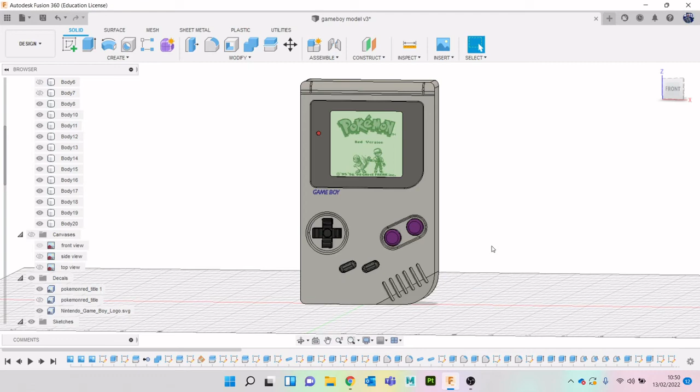So in the past video we've got our overall front shape pretty much finished with the front. We might have to add, if we look back at our reference images, so we need to have like start, select, A, B, so we'll work out those in a little bit.

But we want to have a look at some of these details on the side now. So first of all, let's do volume controls. We've got that little headphone jack, so let's do that. So let's turn our cameras on and let's do our side view.

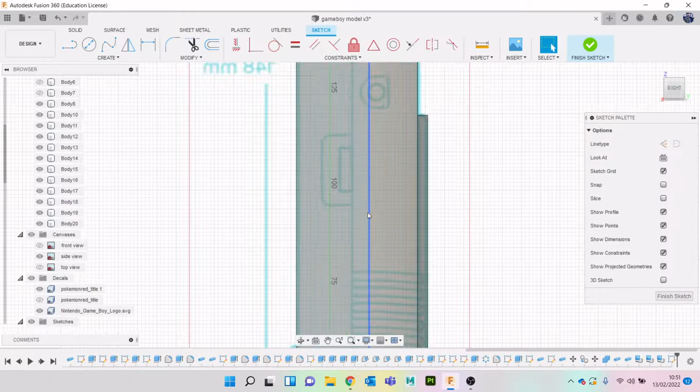Perfect. So let's go to sketch, start a sketch, let's sort of see what we're after. Okay, so it's kind of indented a little bit, and then there's a wheel. So let's hit R for rectangle and let's bring that up.

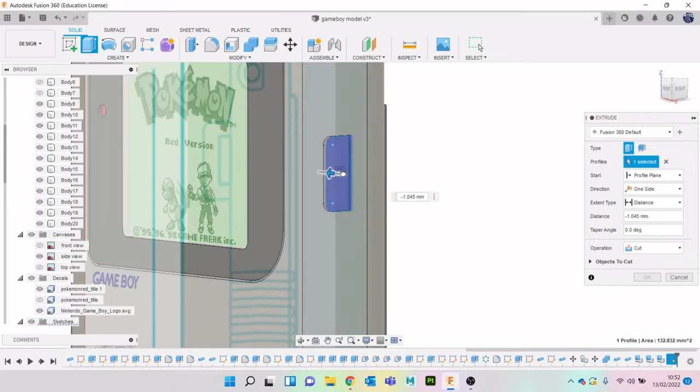Let's fillet. That actually looks okay, let's do that. Hit E to extrude, let's bring that in a little bit. There we go. And then let's do

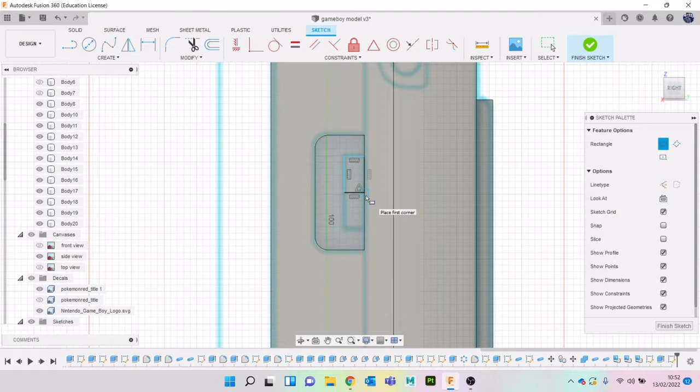another sketch. Let's do R. I'm going to go about halfway, which is there. Sketch, let's go to revolve. Revolve that profile around that body. Let's do new body for now.

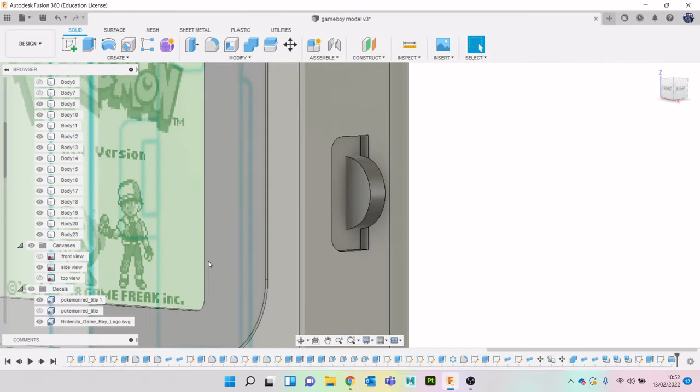We don't want it to stick out quite that much. We want it to go a bit further in. But before we do that, okay, it's a little bit hard to see, but you do have some little details we want to have. So let's right click and isolate.

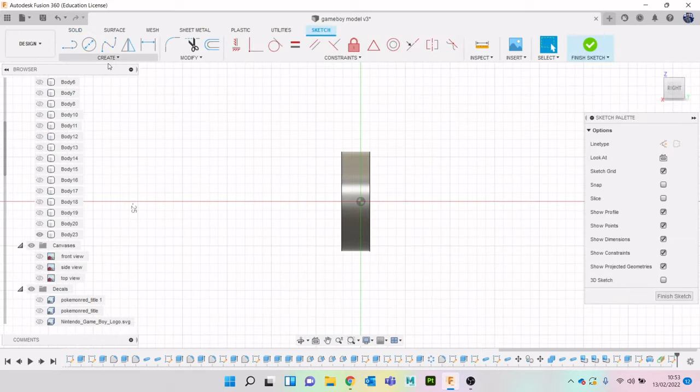Okay, so now let's go to construct tangent plane, click on that face, create a sketch, and R for rectangle. Let's do center rectangle, and then I'm just going to do that. Hit E on my keyboard for extrude, and I'm just going to drag it in just a little bit like that.

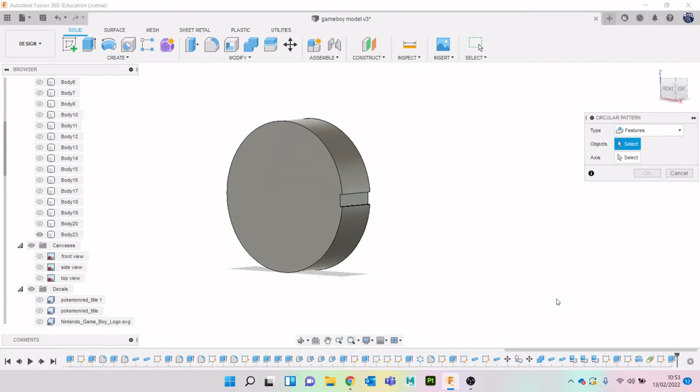So now go to create pattern, select the pattern. I want to change to features. Click my extrude axis. Let's pump those numbers up a little bit and do something like

that. There you go. Let's go to right click and isolate. I'll take that, move, I want to move it in a little bit. It shouldn't be sticking out that much. Let's do something

like that. But we do want to make sure there's space for that. So let's then do combine, tool body, target body that, tool body this. We want to cut, but we want to keep it. So we'll do that. So now you can actually see there is, get rid of that, a hole there for it.

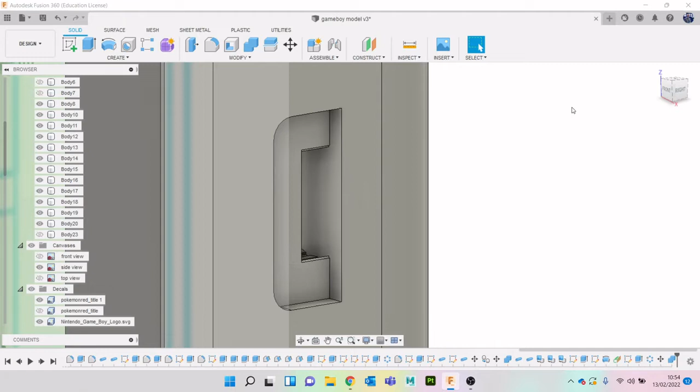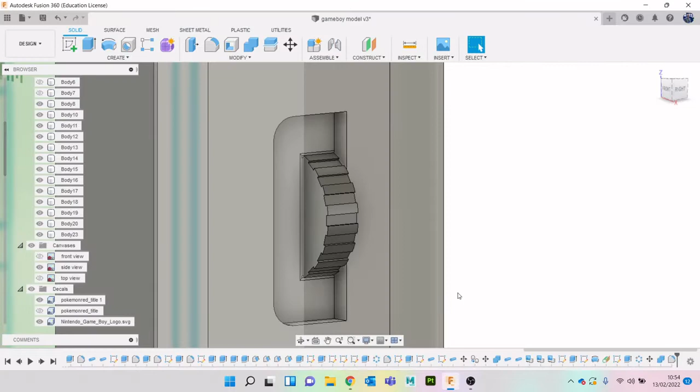Excuse me. Then let's just fillet the edges a little bit, just so we can see it has a little bit of space. There we go. And then I imagine that's just black. Yep, and we should already have our black from our. Yep, there we go. Let's drag that over to there.

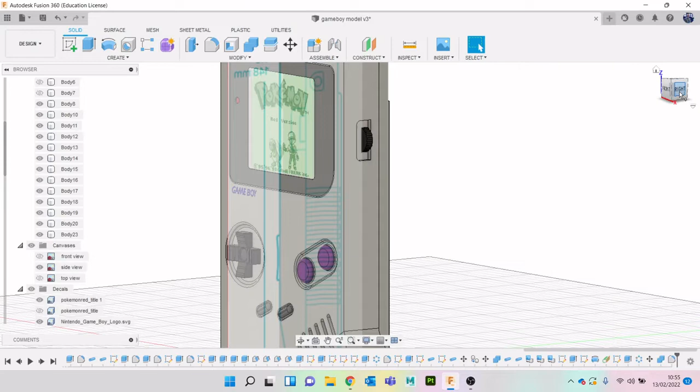Perfect. And then what other details did we want from the side? Okay, so we can close you for now. Let's have a look at this. We'll go to sketch. Let's again do R for rectangle.

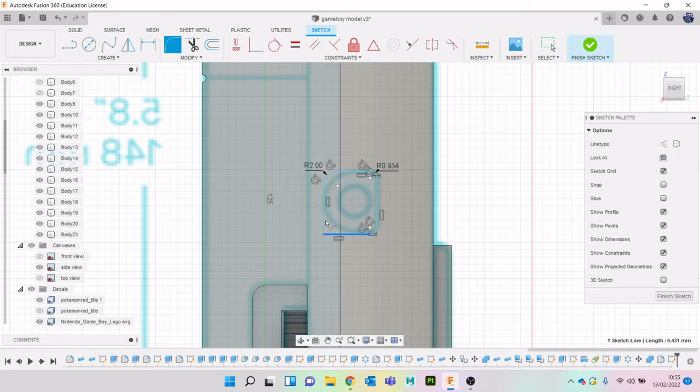A couple of fillets, let's bring it back a bit. Then this one is a much bigger fillet. Enter. And then let's E for extrude, let's bring that in.

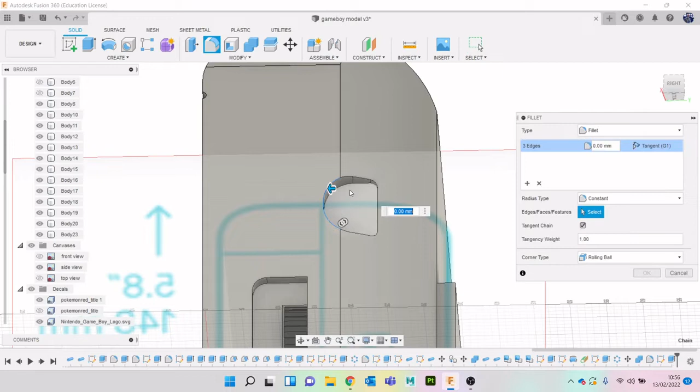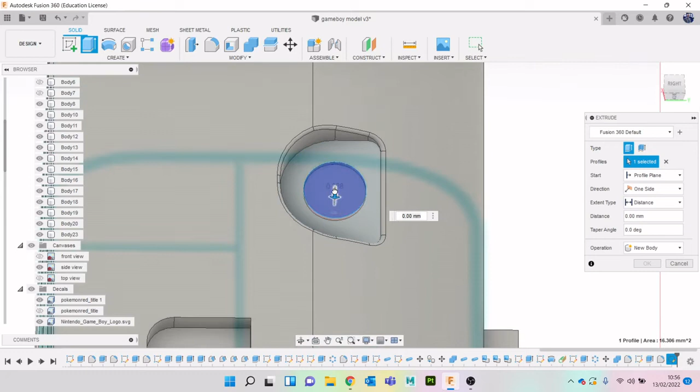Let's fillet that edge so it's not quite as extreme. And then we want to do in the sketch a circle close to the middle as we can do. E, and let's drag that down a bit. Again, let's fillet.

Go back to our reference. Okay, we'll make that black again. Oh no, let's make sure we've got faces, otherwise we don't undo all of our other details we put in. How are we looking? Not bad.

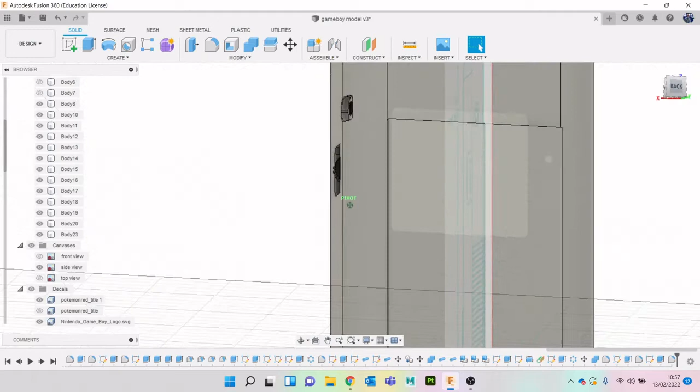Okay, and we're going to start to have some of those bent lines go all the way round, don't they? So really, let's have a think. I'm thinking I'll probably do them the same way I did in the previous video, where I kind of did a projection and then...

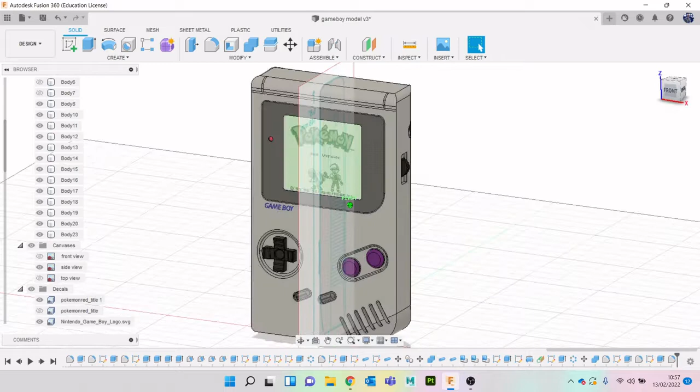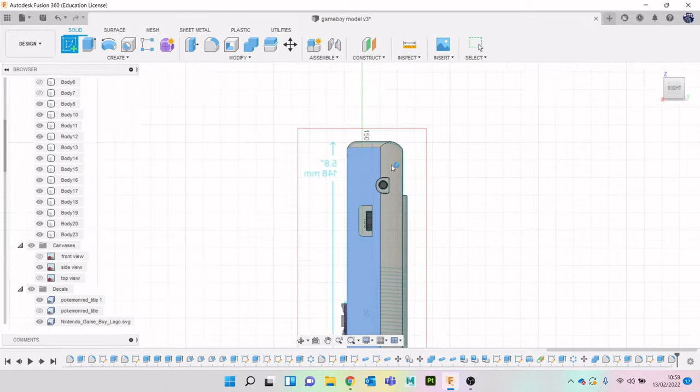Let's do the bottom bit first, so I'll do all the side details. If we look back, we want this little headphone jack coming along there. Oh, we also of course want to have...

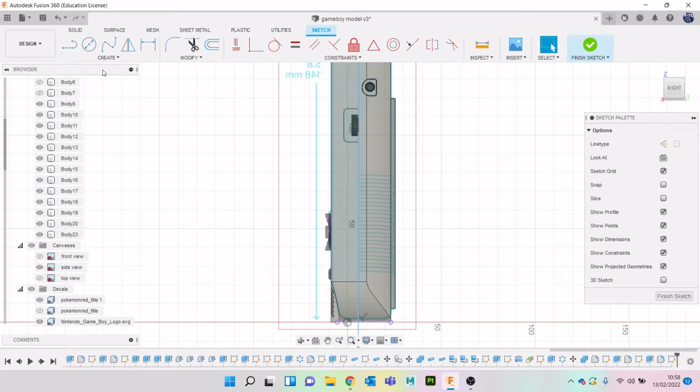Let's do this line first actually, our join from the hollow casing. Turn snap off. I turn snap off. Let's bring you all the way down. Finish sketch, create a pipe. I do not want to cut that, so that's...

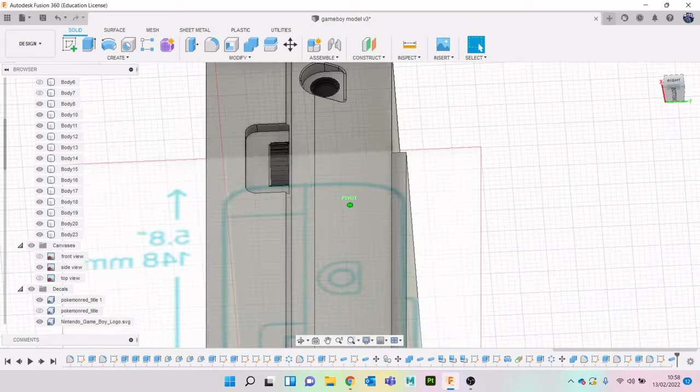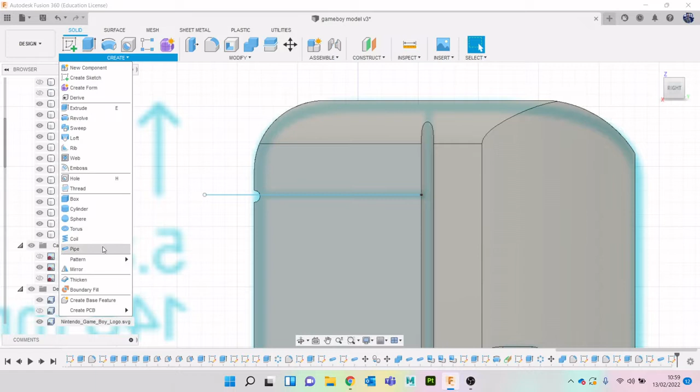Okay, and then do the same up here. Create pipe. Okay.

Now we've got the same thing from before that we need to make sure we are doing. So let's go to sketch, hit P for project, and just grab that. Finish sketch, create pipe.

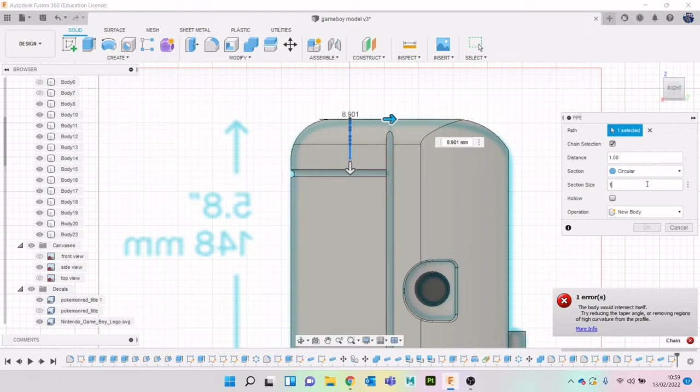Go to new body and let's just drag. Oh no, we don't need 1 mil. There we go, new body. Right click, move, go into position, then let's cut. So target body, tool body. Don't want to keep it that time. There we go.

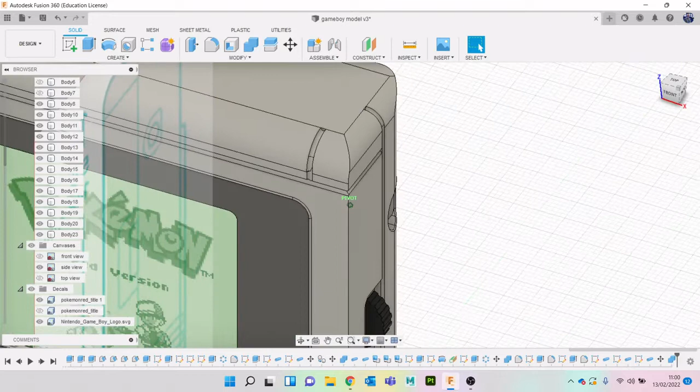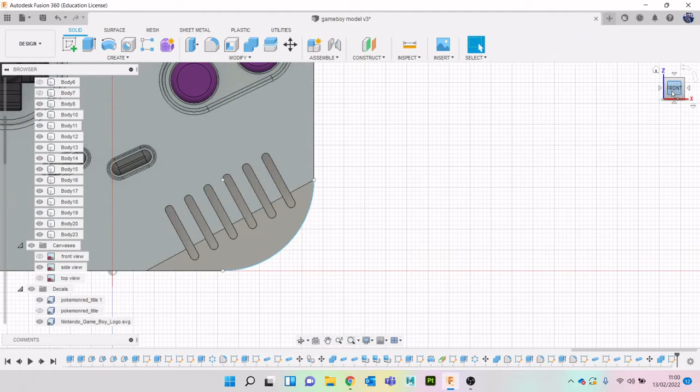And then we'll do the same down here. So let's create a sketch, P for project, let's grab that, let's go to create pipe.

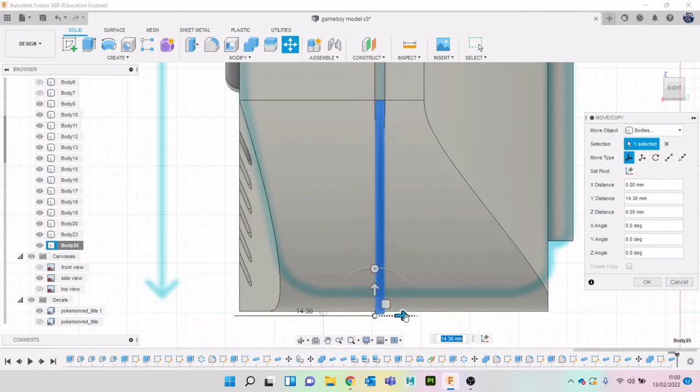Again, I should always remember our measurements. Right click, move, okay, excuse me, and then let's again combine, target body, tool body, cut.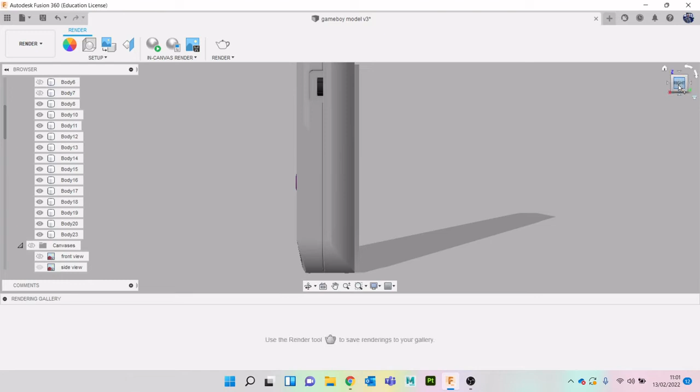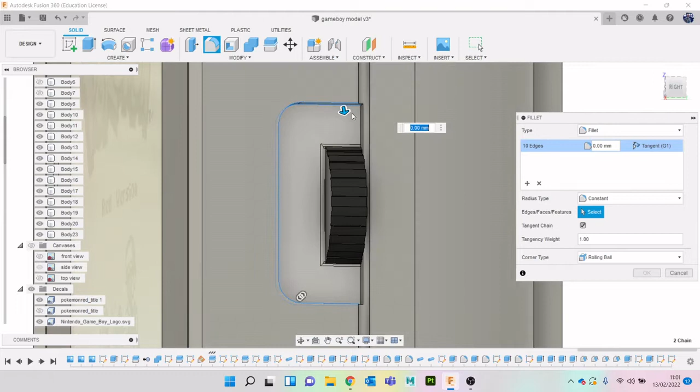Let's turn our canvases off for a second, see how we're looking. Not bad at all. Maybe we should just look at adding just the slightest of fillets here, just to make it look a little bit more or less aggressive. There we go.

And then let's just check. I'm assuming at the bottom we're going to have the same. Yeah, so at the bottom we have got the same thing. So let's go to sketch. Oh, there we go, line. Come straight across. Sketch, create. And all this is doing is giving the illusion that it's been molded and that's how we join.

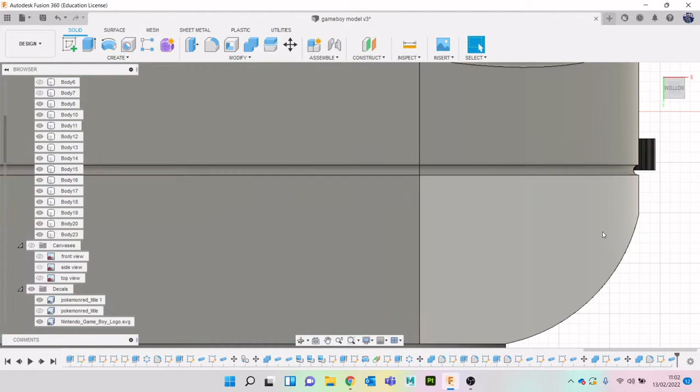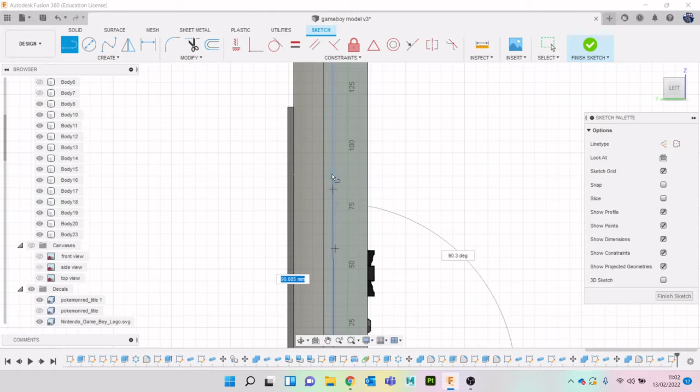So we'll just cut straight across there. We obviously will need to do the same thing on this side. Let's go to sketch. Just to make sure it's all in line. Sketch, create pipe, and cut.

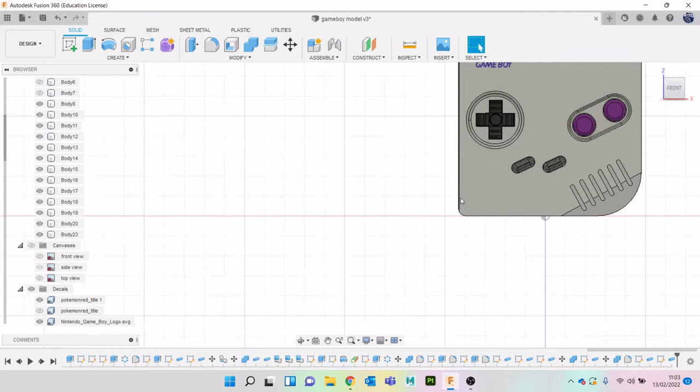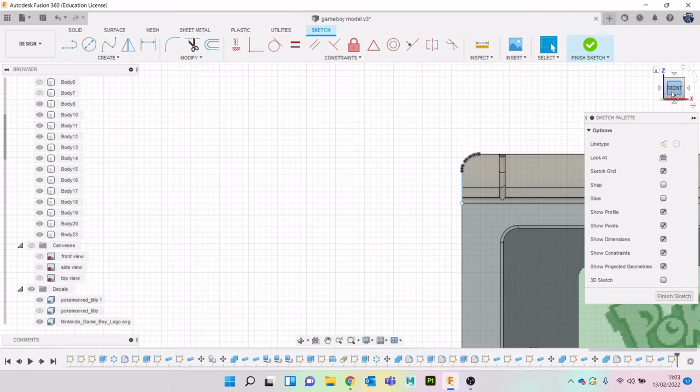And again, just do those corners the same way we've done before. P for project, let's just project that corner, and then we'll do the same thing, we'll project those. So then what we can do, let's do the bottom one first. Finish sketch, create pipe.

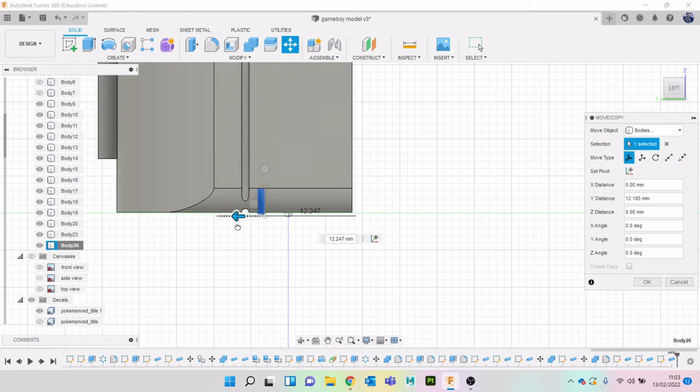Make sure we change it to new body, okay. And then right click, move copy, and let's move it into position. Zoom in as close as we are, so we're happy with it. Combine, target body, tool body, cut.

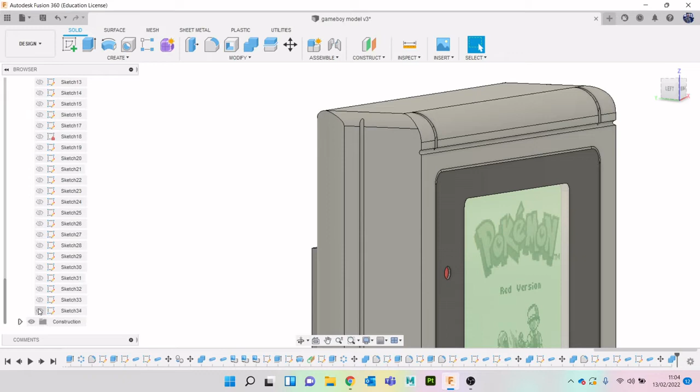And then we'll do the same up here. Our sketch had disappeared, so let's turn that back on. Create pipe, new body, okay. And then go back to bodies, right click, move copy, move it over, zoom in so we know we're lining it all up. Okay. And then same again, combine tool body, target body, sorry, tool body, and cut.

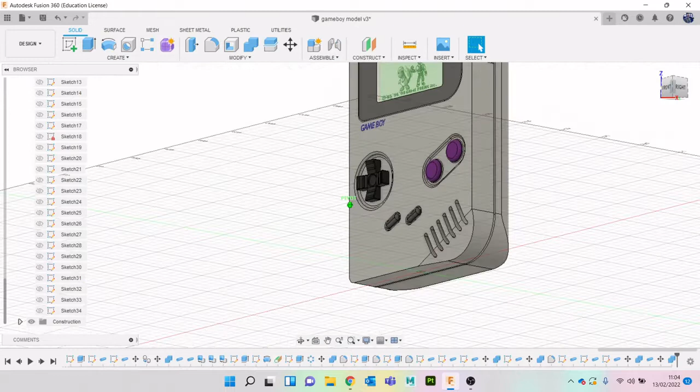So we have now got our join going all the way around there. We'll need to just do the top as well. We do have the top view. Oh, there we go. So let's just do that while we're here.

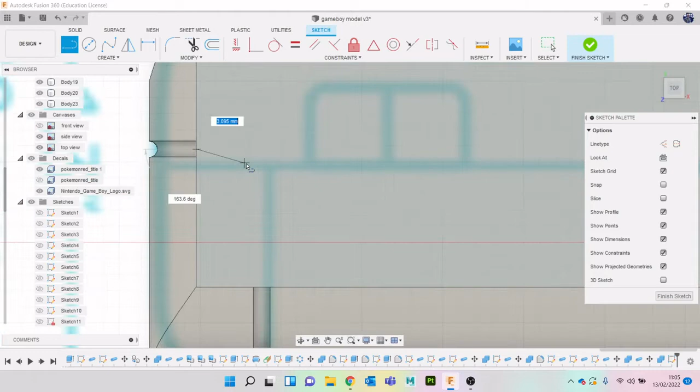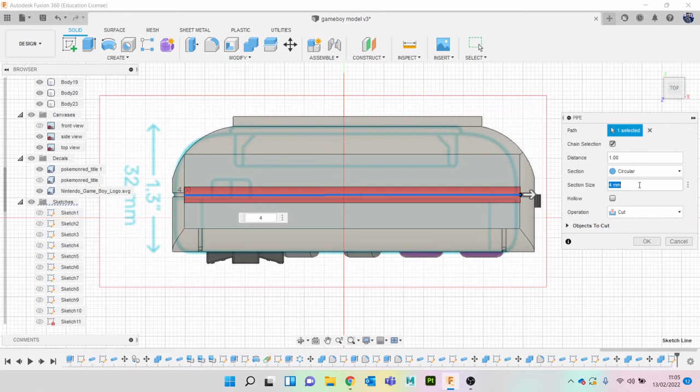Sketch line, we want to go right in the middle of that. Finish, create pipe, oh, create pipe, oh no, 1, not 11, 1, enter.

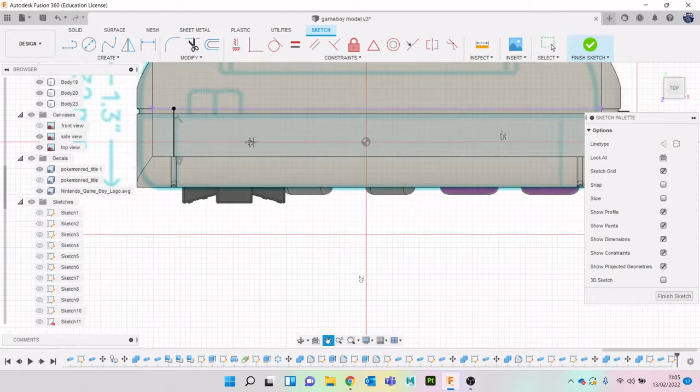Okay, so we've got those joints going quite well. We do need to do these ones as well, so let's do that line. We'll do them both at the same time. We can't do the pipes at the same time, but we'll just do the sketch at the same time. Create pipe, cut, and then we need to turn our sketch back on because it turns off automatically. Create pipe.

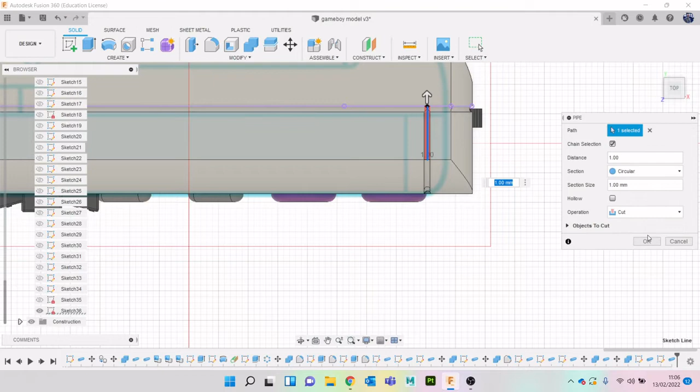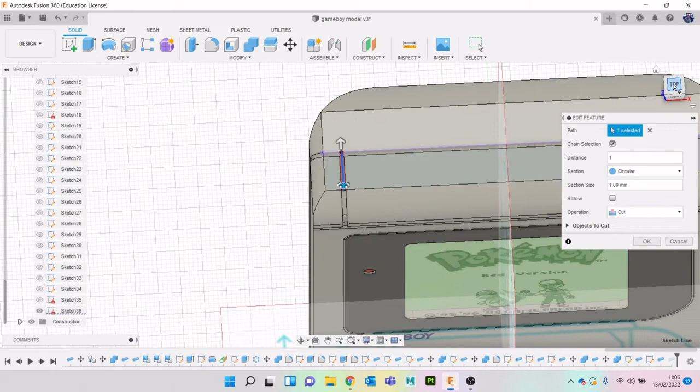Okay, so now let's turn off our sketch. Okay, maybe let's just go back and edit feature slightly. Let's just bring it back. Okay, that'll be fine. Let's do the same on this one. Bring you back just a smidge. There we go. Okay.

So we've got all of our joins. While we're doing the top, let's just stick with that. So we have got, can we get the top view?

Okay, well let's keep that one because that's the one we want to keep. Let's go. Top view. Okay, so that is our power button.

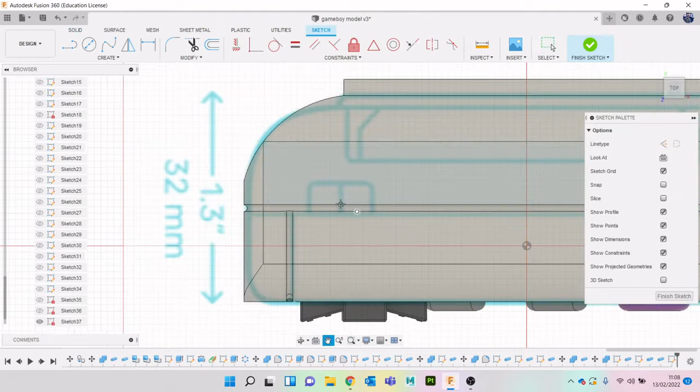So let's make a sketch. And obviously we've gone off our reference slightly, so we're just going to make a few slight adjustments, which is fine.

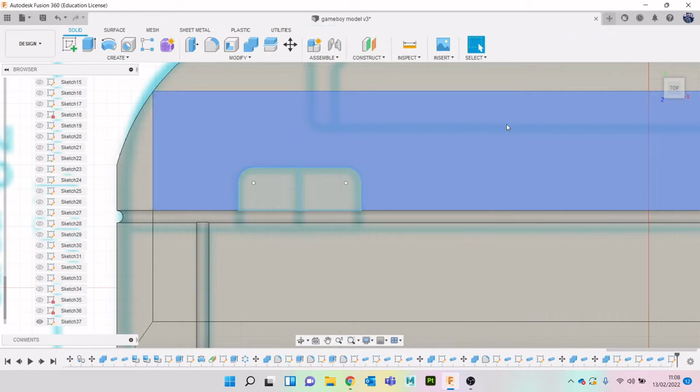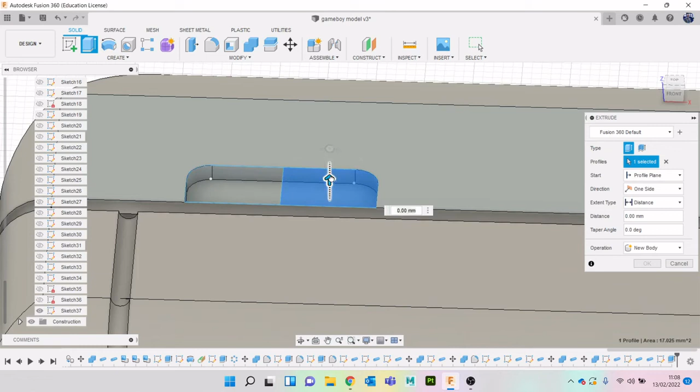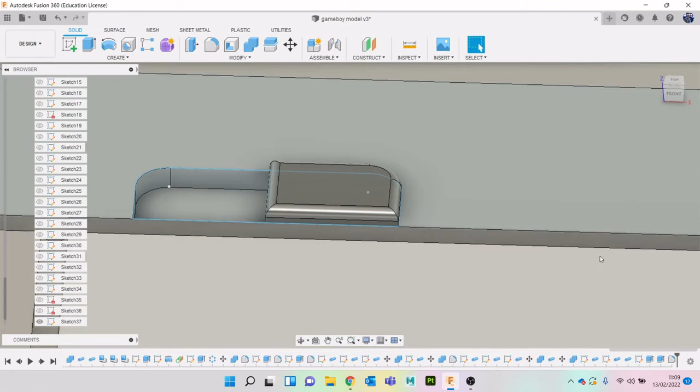And then let's turn that sketch back on. Fillet those edges. And then you want to have a circle at the top, so let's sort of find the middle. Extrude, drag up, and then let's fillet that round as well.

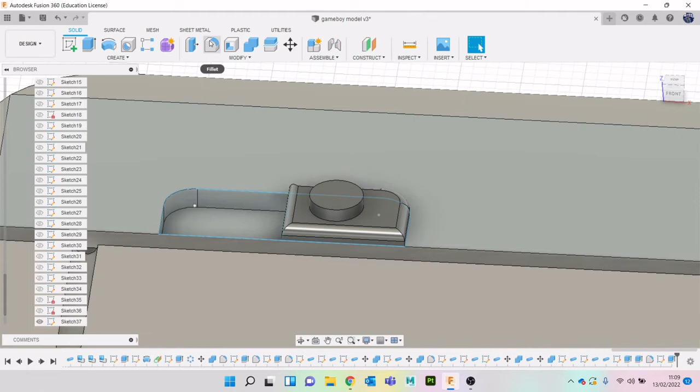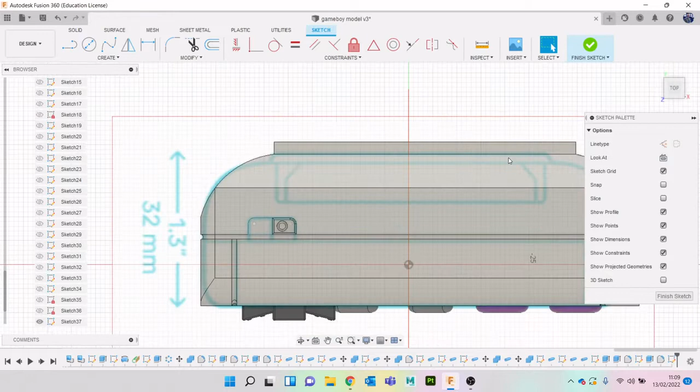I guess that's power button done. And what else top view wise? Right, let's do the little groove where the actual game comes out of. So let's do a sketch. Do R for rectangle. Okay, and then let's fillet round.

Okay, then fillet there. Enter. Then let's E for extrude. And then we want to bring it down. And then how far do we bring it down? Let's have a look. Okay, pretty much to about there.

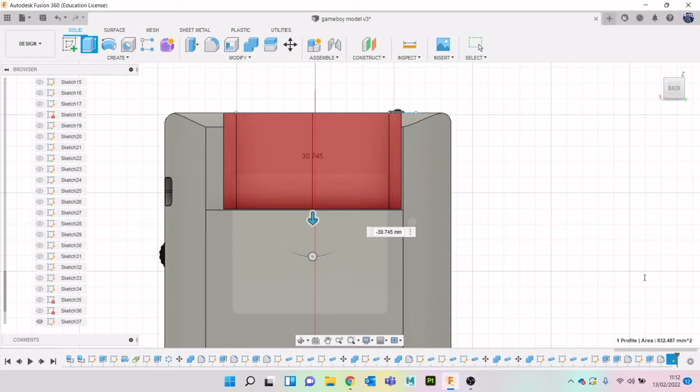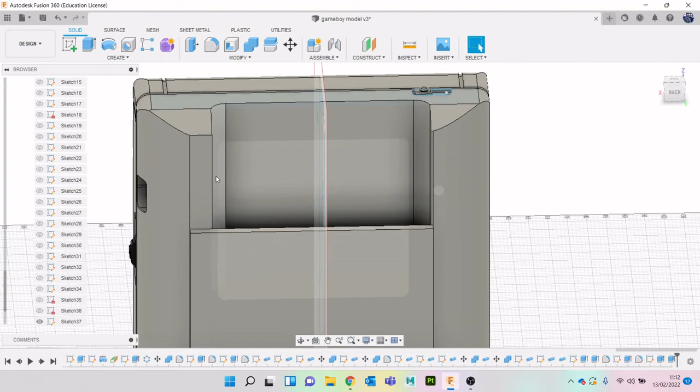Okay, and then what we will do is let's bring it down, because the game does go further down there, just for the illusion that it goes further down. All right, then let's just fillet around some of these edges a bit again, so they're not quite as harsh. Don't want much, just something like that.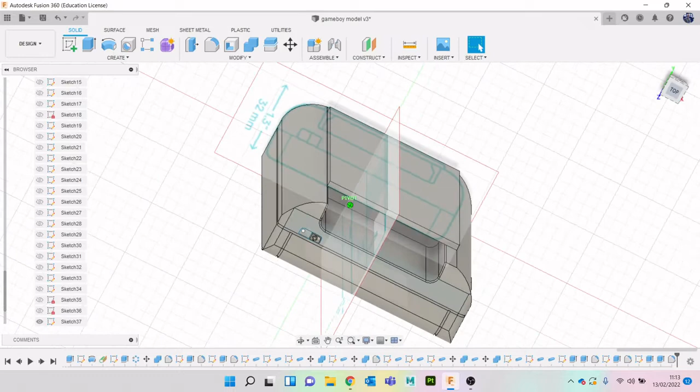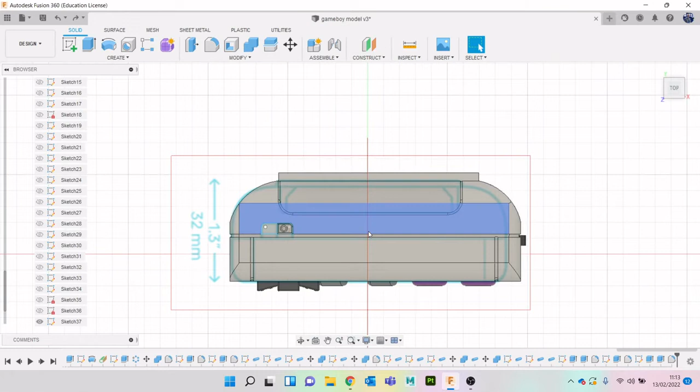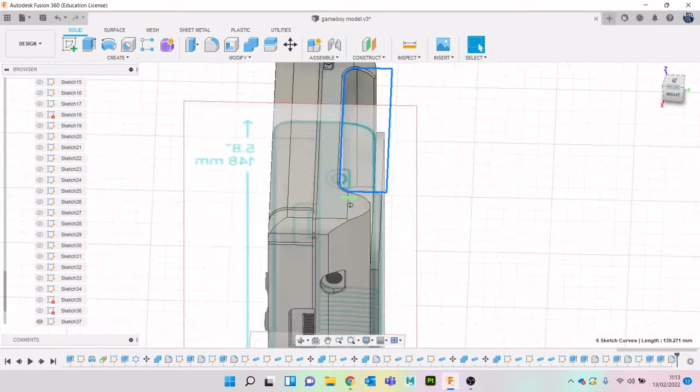Okay. I just want to have a look because it bothers me slightly that that is not in the center. Can I just move my entire sketch? No, hang on, edit sketch. And then there you go, that looks better.

I know that's slightly off from the reference image, but in terms of making it look more realistic when we finally render it, it looks a little bit better. It looks a lot more centered that way.

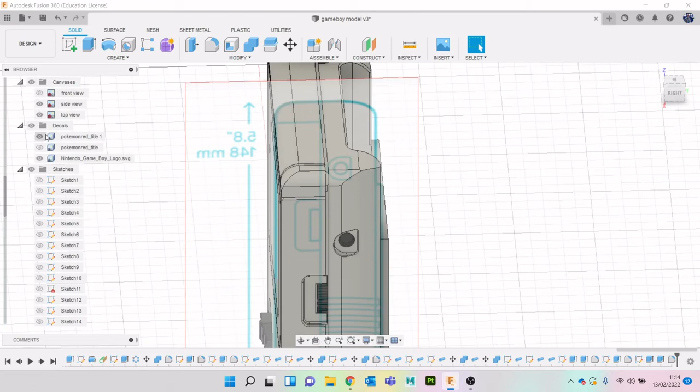Okay, so let's just have a look at where we're at. Let's turn our decals canvas off. So we have now done top, we just need to do our bottom a little bit. Our front is done, our sides are done. It then will just be those like groove, these bits go all the way around. Let's do this little bottom part first.

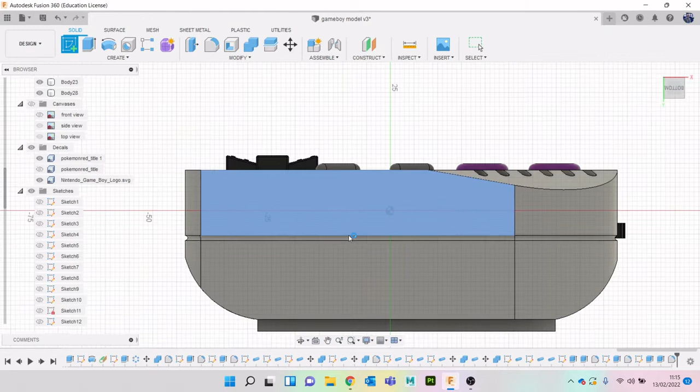Now, annoyingly, I don't have a reference image that says where that is, but it looks pretty central. So let's do that. Is that going all the way? No, okay. So let's do a sketch. Do R for rectangle, let's do center, middle. Let's just fillet it round.

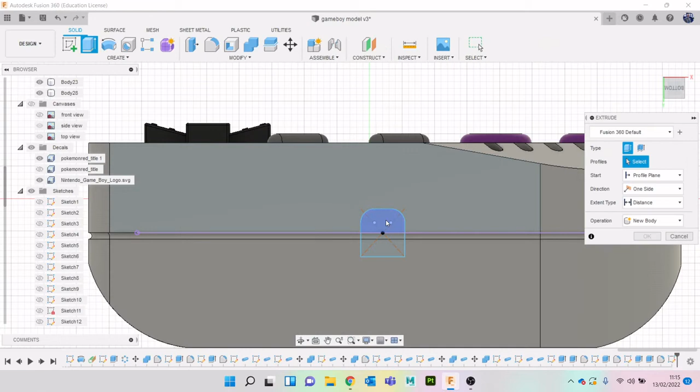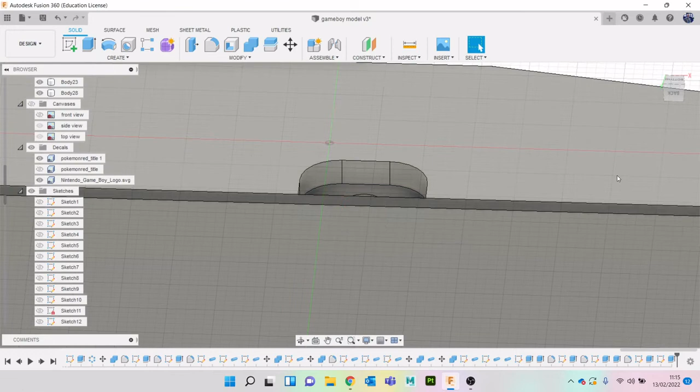E for extrude, drag you down a bit. Then let's sketch on you. Circle. And like we did before, drag down a bit more. Again, it's not actually serving a purpose, but it makes it look a little bit more realistic.

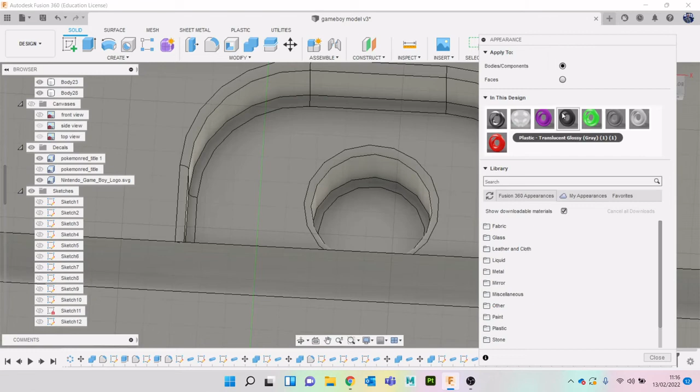And then we'll fillet these edges as well. And for appearance, let's grab that black that we've already got. We want faces. Get the close. Oh, everything looks black on there, doesn't it? So let's do everything black. Oh no, back to faces again.

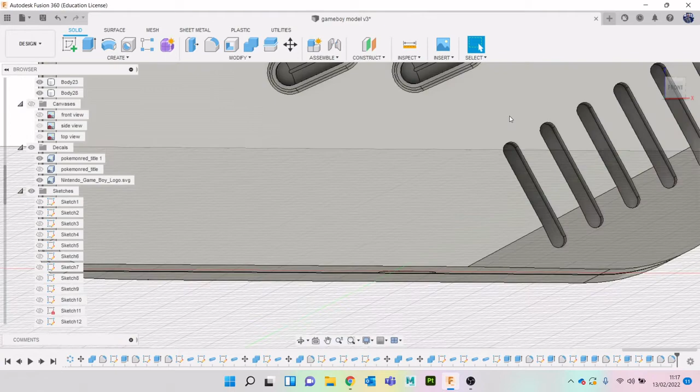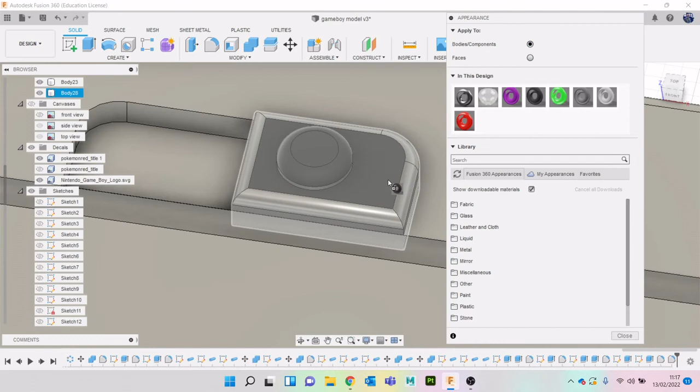Okay, let's come out, have a little look around again. So now I've got our bottom done. Now we need to add some colour to this as well. Again, we'll use that same black. Is that all one body? Yeah, that is. There we go.

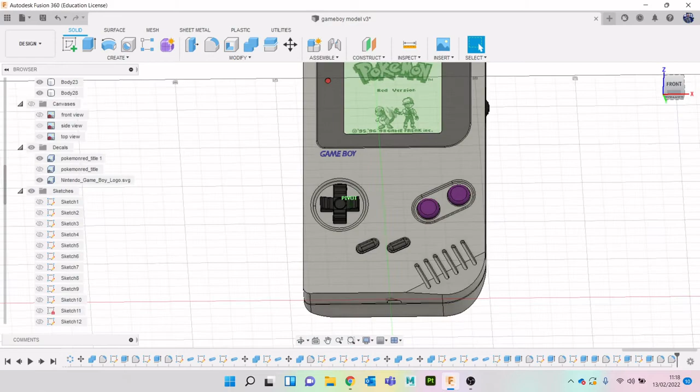So I think what we'll probably do is stop there. Again, really good progress made. So we've pretty much got the front done, bottom done, top, and then it's just sort of finalizing the details at the back. So let's stop there, let's just do a quick little in-canvas render, see how we're looking.

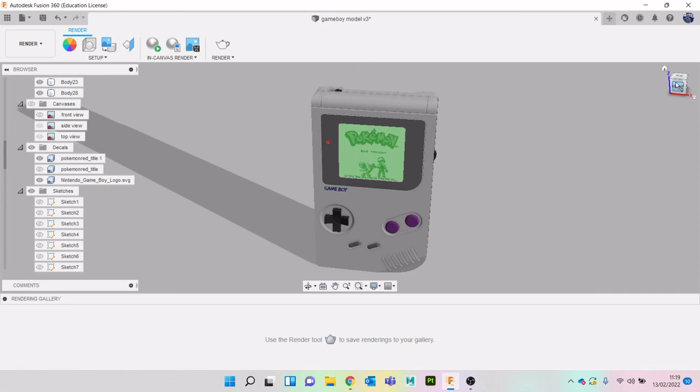We'll tweak the material slightly, make it a little bit less shiny - well, shiny is not the word, but okay, yeah, let's stop there. And then in the next video, we'll probably finish it off. So yeah, let's stop there, and I'll see you in, hopefully, the final part.